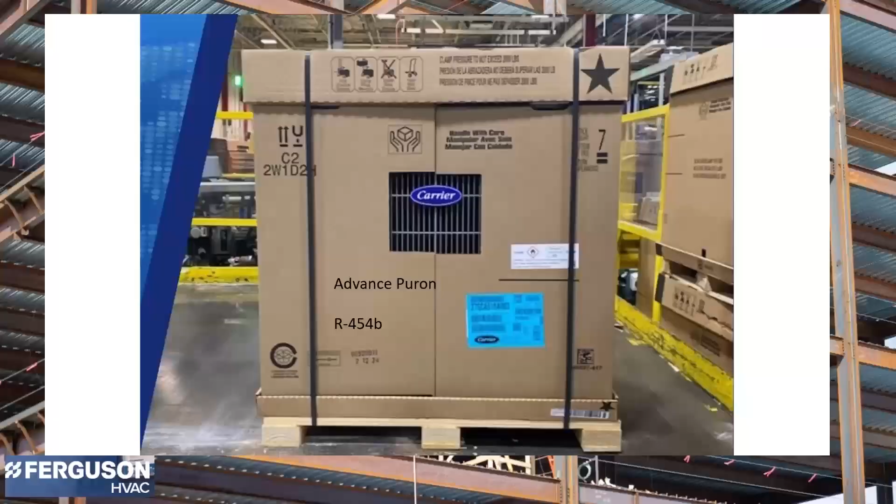Major manufacturers are starting to ship R454B units. You're beginning to see these units in the field. So let's go over some of the tools that you're going to need to work on R454B units.

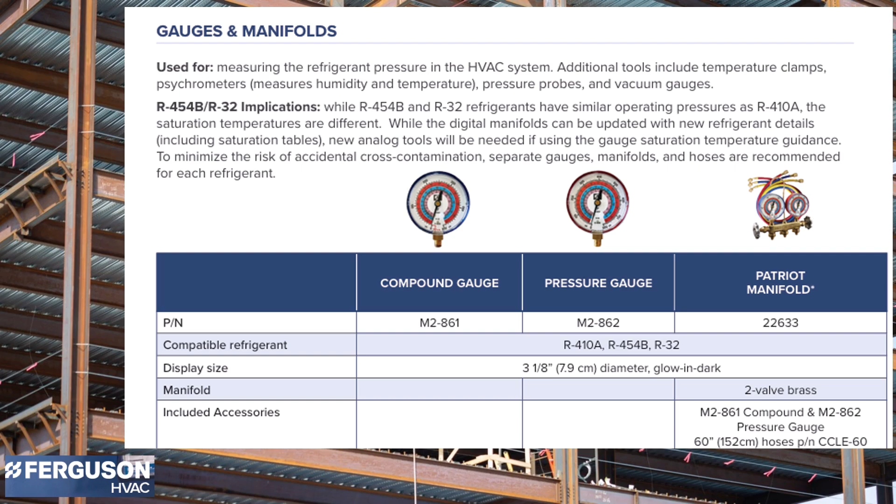Of course, the first thing that you're going to have is a R454B gauge set to work on the units, to make sure that you have the proper pressures to work on units that have 454B or R32 in them. Your digital gauges will have to be updated with the new refrigerant details to show the proper saturation tables. Check with the manufacturer of your particular brand of manifold gauge to get your upgrades to the electronic gauges.

The next major expenditure that you're going to have to work on A2L refrigerants will be your vacuum pump. The main thing with these machines is that it has to be a no spark piece of equipment. So make sure that your vacuum pump meets the requirements for A2L refrigerants.

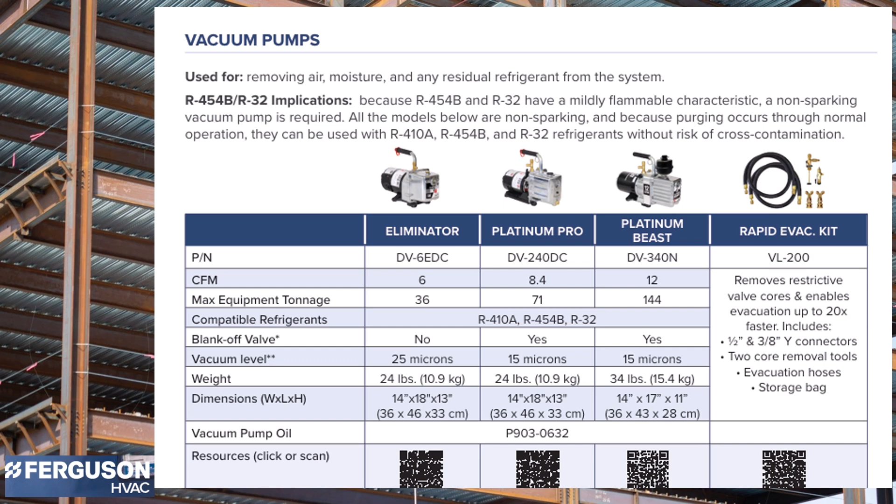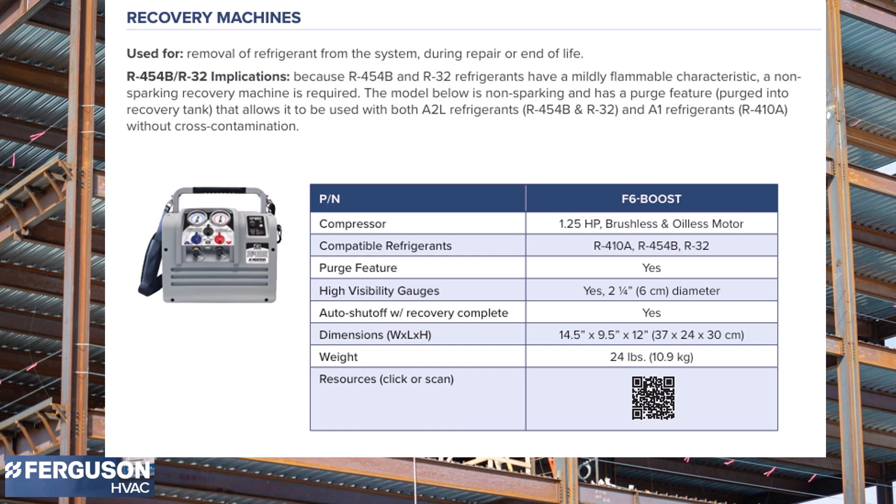Because A2L refrigerants have a mildly flammable characteristic, a non-sparking recovery machine is required. Make sure that the recovery machine that you have is compatible and is designed to use with A2L refrigerants.

You will also need to have recovery tanks that are designed for R454B or A2L refrigerants. The main difference will be the red stripe on the recovery tank that will identify it as an A2L refrigerant. Also note that these tanks will have reversed or left-handed threads, so you must have an adapter to access these recovery tanks.

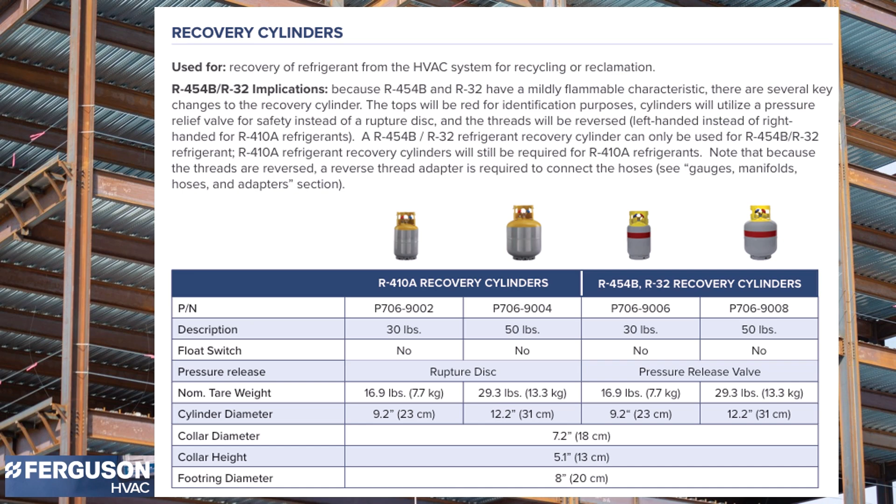Another thing that you'll have to make sure of is that the apps that you have on your phone for wireless devices that you use to check charges and temperatures on units are compatible with R454B refrigerant. And as we've already stated, your digital manifold gauge sets will have to be updated to the new refrigerant.

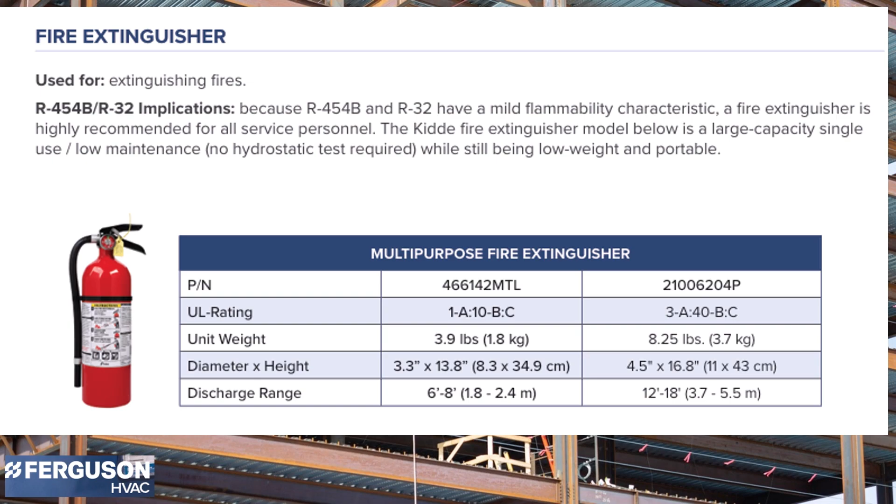Because R454B and R32 have a mildly flammable characteristic, a fire extinguisher is highly recommended for all service personnel. So make sure that you have a fire extinguisher that is designed for these mildly flammable refrigerants and carry it with you at all times when you are working on R454B units.

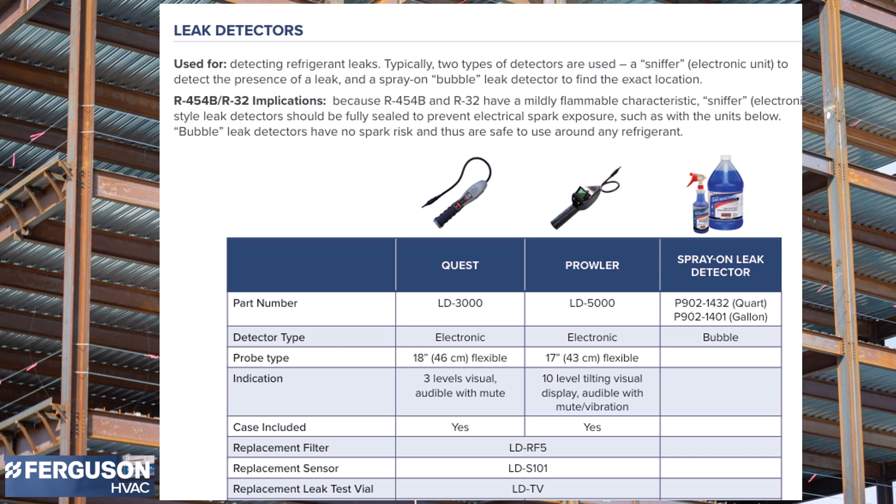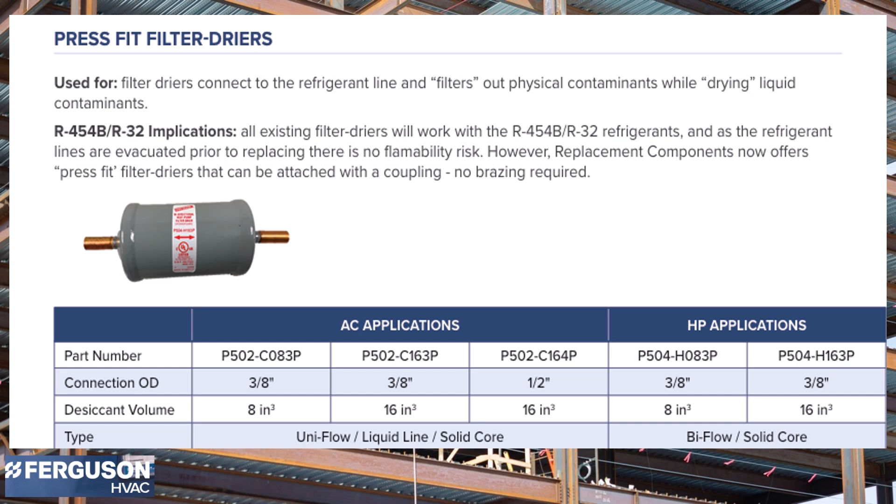So with filter dryers, all existing filter dryers will work with the R454B refrigerants, and as the refrigerant lines are evacuated prior to replacing, there is no flammability risk. However, Replacement Components Department now offers press-fit filter dryers that can be attached with a coupling with no brazing required.

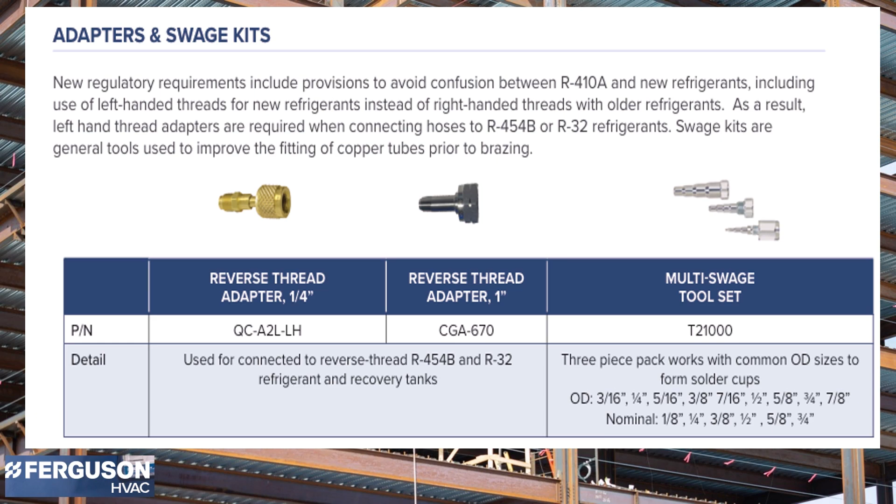New regulatory requirements include provisions to avoid confusion between R410A and the new refrigerants, including use of left-handed threads for the new refrigerants instead of right-handed threads with older refrigerants. As a result, left-handed thread adapters are required when connecting hoses to R454B or R32 refrigerants.

In most of our R454B classes, the question has arisen regarding disconnects on outdoor units. Carrier confirmed this week that disconnects can be mounted on the HVAC unit if necessary with the A2L refrigerants. Most disconnects are usually mounted on the wall of the building, but if the case comes up where the disconnect needs to be mounted on the unit itself, Carrier has confirmed that this is acceptable.